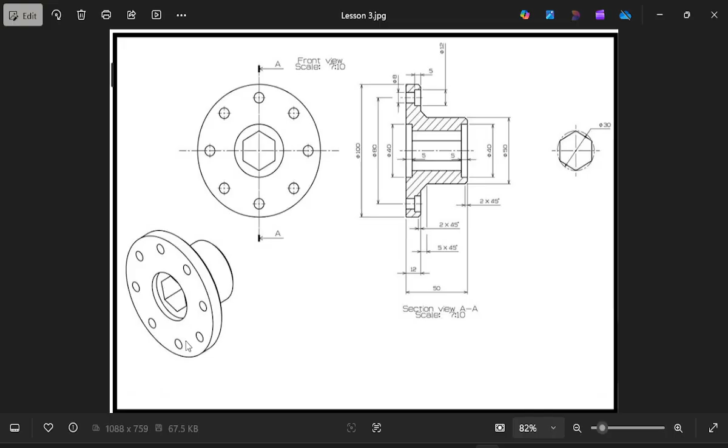Hello guys, in this video I'm going to make this part in SolidWorks, and this is a kind of flange but having a hexagonal hole in it. And if you want to see the dimensions, you can see them from the section view.

This is 100 diameter, maximum diameter is 100, and the center of the holes are at 80 diameter, a circle of 80 diameter. This hole is 40 and its depth is 5, and this one is 12, you can see it given here at the bottom, it is 12, and this from this line to this line is 50.

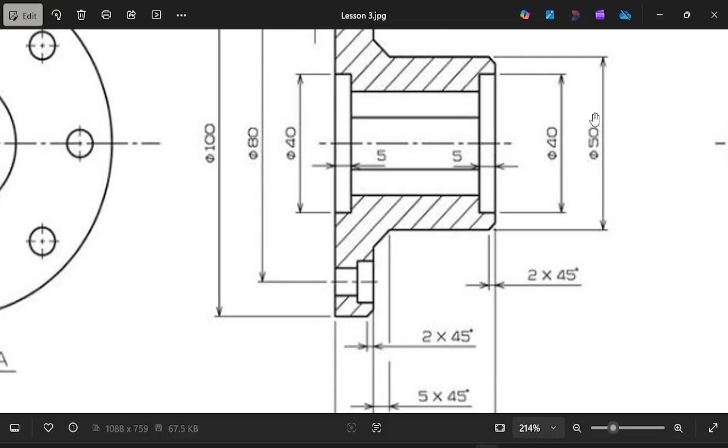And from this to this it is 50, and here there is a 5 chamfer and a 2 chamfer. The 5 chamfer is here, and this is 5 from here down, because this is 50 minus 40 divided by 2, it is 5 here and 5 inside, then depth, and then up to the center line, and then we will make this.

So we can make it using many strategies, but I will use the revolve boss base command in SolidWorks, and I will make half of the sketch.

This is the sketch. First I will draw a center line, then start a sketch, go to 5, this one, and because this will be 20, 40 is diameter, half of 40 is 20, so this will be 20 from the center line, and then this will be 5, and then this will be.

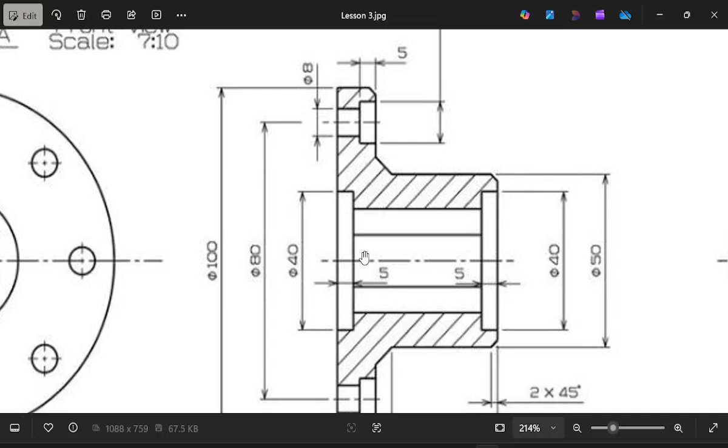50 minus 20, that is 30 up, and then 12, and then down it will be 25 here, so it will be 25 down, and then 30 this one, and I will use the chamfer of 5 this and 2 this, and then I will revolve the boss base, use the revolve boss base, and then I will make the cut according to the 30.

Circumscribed hexagon, and then I will make the hole and the countersink of the hole for the bolts. Okay, it is a kind of flange.

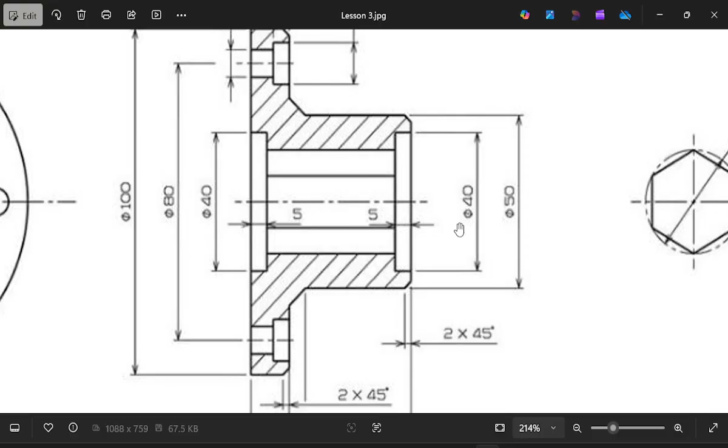So let us start this in SolidWorks.

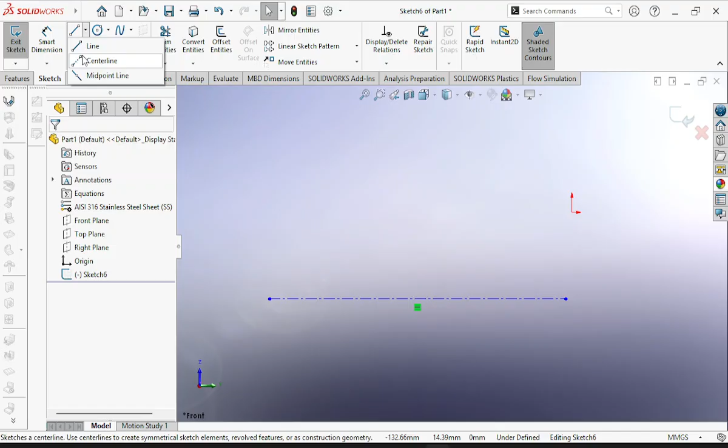So you can see here I have started a part already in SolidWorks, so I will start a sketch, this one. I will use the center line first, and draw a center line here anywhere, but it should be horizontal, so I will make the center line, and from this center line I will start the sketch as per our drawing.

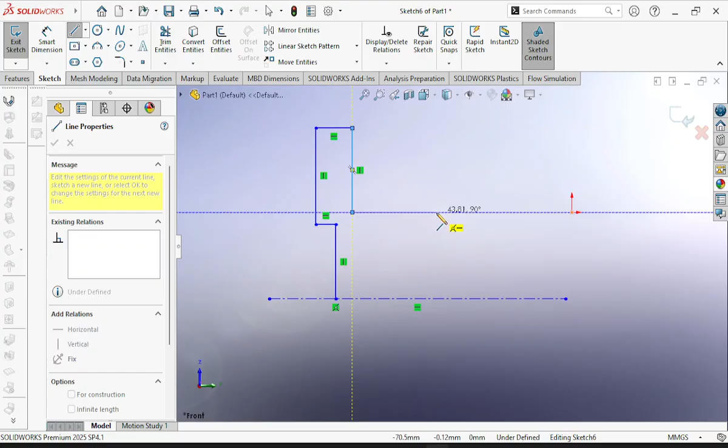So it will be 20 from this center line, 20, and then it is approximately 5, and then it is 30, and then it is 12, and then it is about 25, and then it is like 38, and then I will go down straight, and then I will close the sketch.

Okay, so our sketch is now ready, and now I have to give the dimensions. To give the dimension, I will use the smart dimension command. So first of all I will give the dimension here.

It is 20, 20, and this is 30, so that overall is 50 from the center line.

Okay, and this one it is 12, 12.

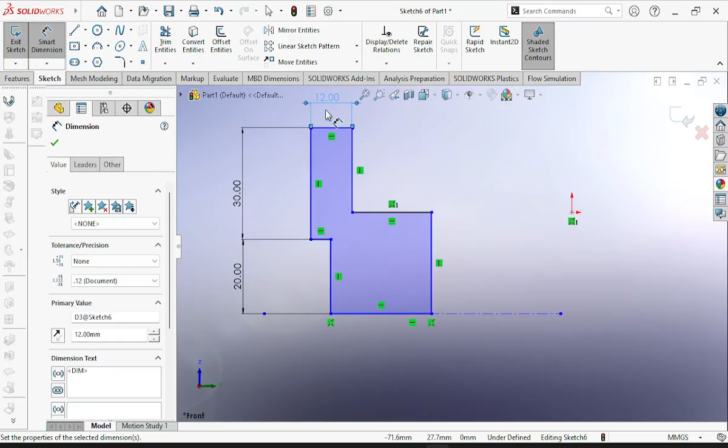And this is 25. This is 25 mm, and this is also 25 mm.

This is constrained already, so it will not take this one because it is 50 and 25. This line, it is already 25, it has given it. And this will not take this dimension as well, I think.

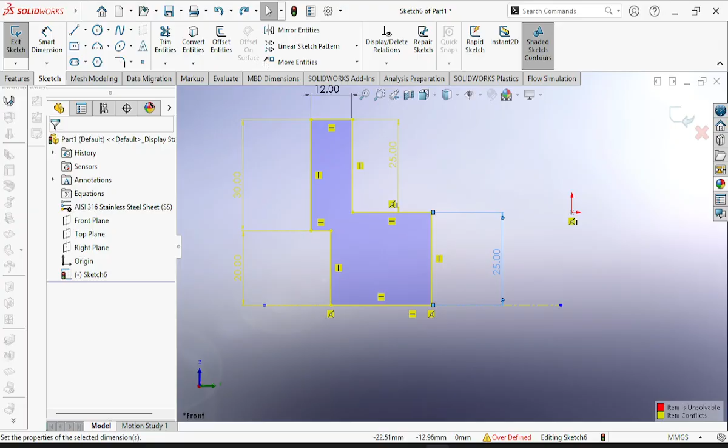So this bottom dimension is not required, but we need a dimension for this one, 5 mm. This should be 5 mm. This is 5 mm.

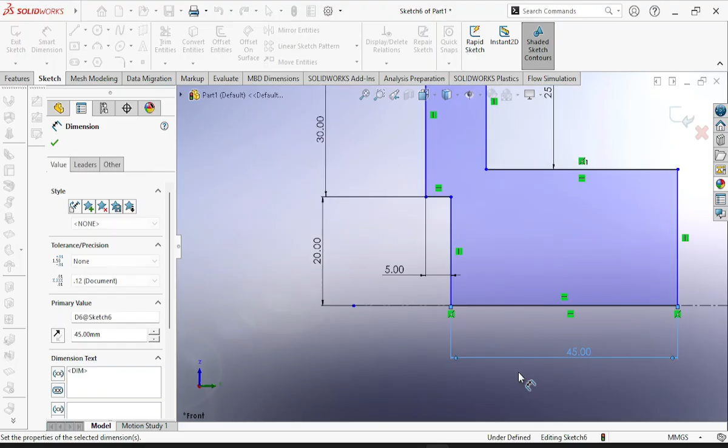So it is 50 minus 5, it should be 45 mm already, so it won't take this one, I hope. 45 mm. Okay, so it is 45 plus 5, 50, so it will be 38 mm. 38 mm is correct there, but it will not take it, it will be a driven dimension, not a driving dimension.

And now you see here, we have given most of the dimensions. Now it is time to make some adjustments, like there is 5 mm down and 5 mm here also, so I can make this one here.

Actually it was approximately 5 mm here, and then down like this. Okay, this was there, so I have to trim this side, and I have to remove this one as well.

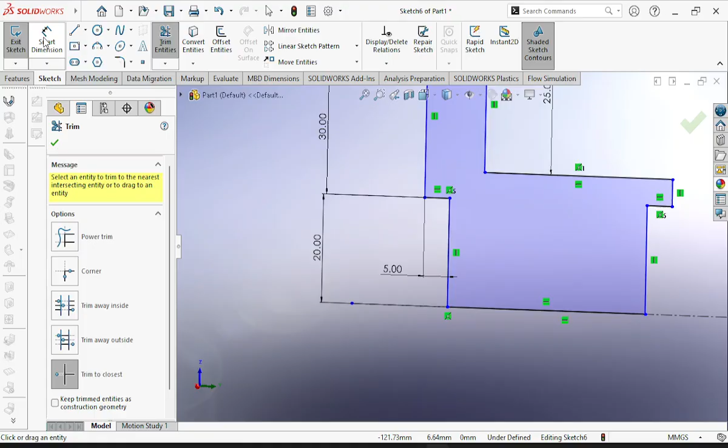Okay, so this is also 5 mm. This is also 5 mm, and this one is also 5 mm. 5 mm is there, it is already 5 mm.

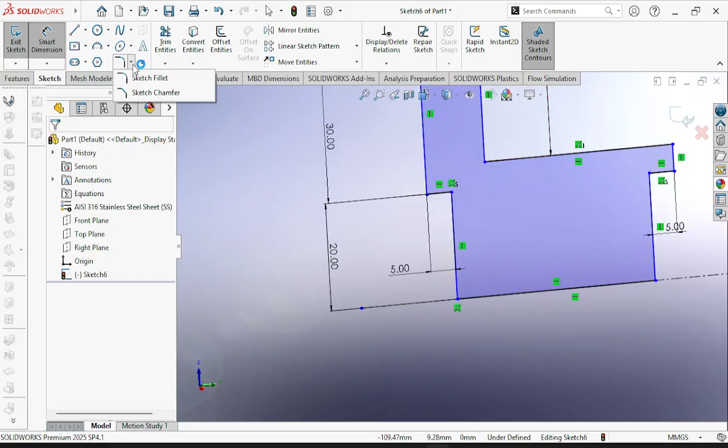Okay, so our sketch is almost ready, and now I have to apply the chamfer. To apply chamfers, I will take the chamfer, and on this corner it is 2 mm, and at the top corner it is 2 mm too. Here it is 2 mm and here it is 2 mm, so I will apply chamfers here.

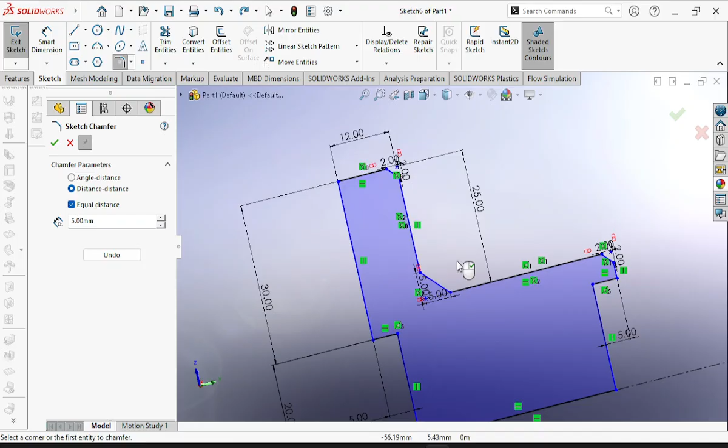It is showing 5 mm but I need 2 mm. First I will take, control S, and start chamfering again. The chamfer is 2 mm, and now this chamfer is also 2 mm. I will take the chamfering command again, and this chamfer is 5 mm. I will apply this chamfer here. It is 5 mm now. You can see it is 5 mm, and there is no other chamfer, so the sketch is ready.

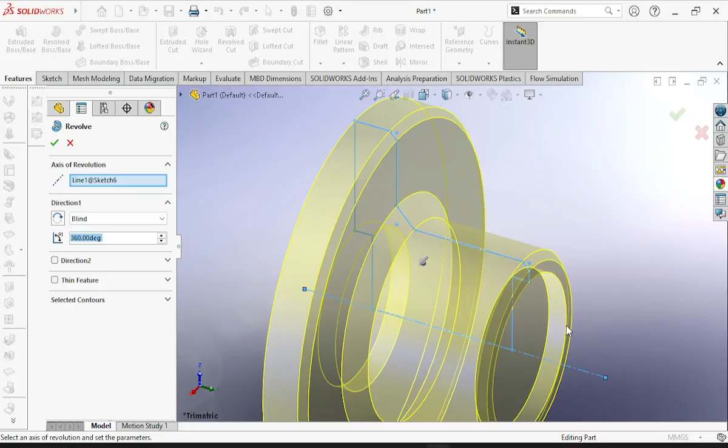So I will exit the sketch, and now I will take the Revolve boss base. It has already taken the sketch and the center line as the axis, and it is done. So you can see it is already here. This has been done, but I need only the holes. So first I will make the center holes, a hexagonal central hole.

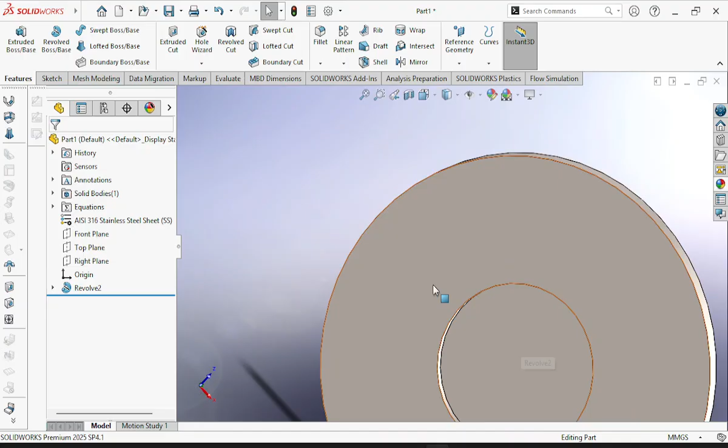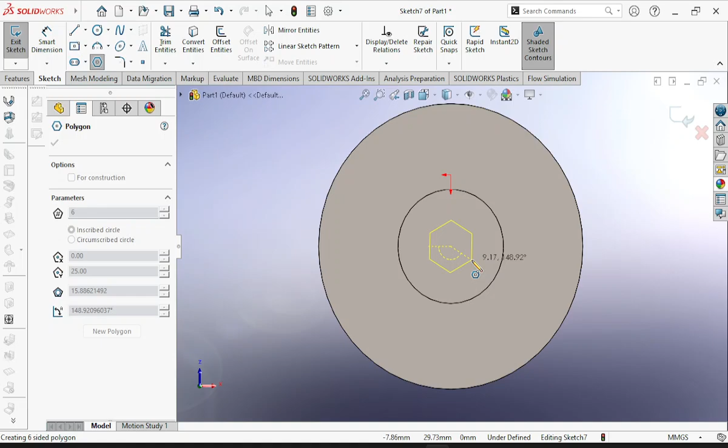To do this I will use sketch again and take the polygon. For the polygon it is 6 sides already, and I will take the center of this circle. Center is here. I will use this one, and it says inscribed circle, but I need circumscribed circle with 30 diameter. So I will use circumscribed circle, and the diameter of this is 30 mm. So I will use diameter 30 mm, then select OK, and exit the sketch.

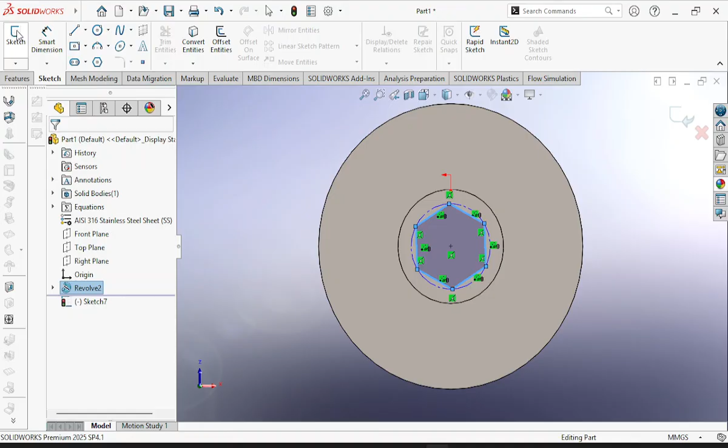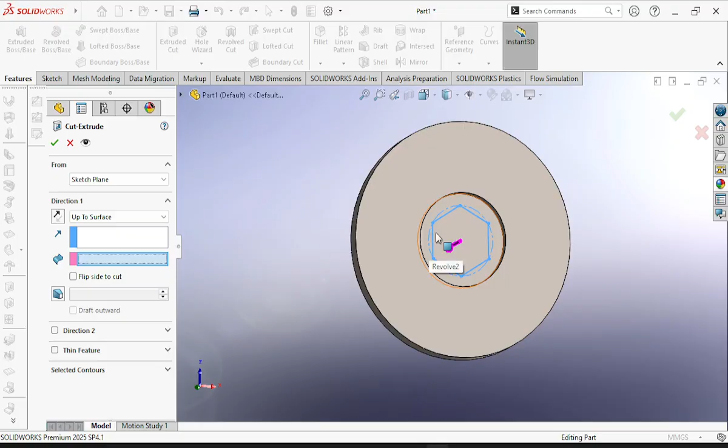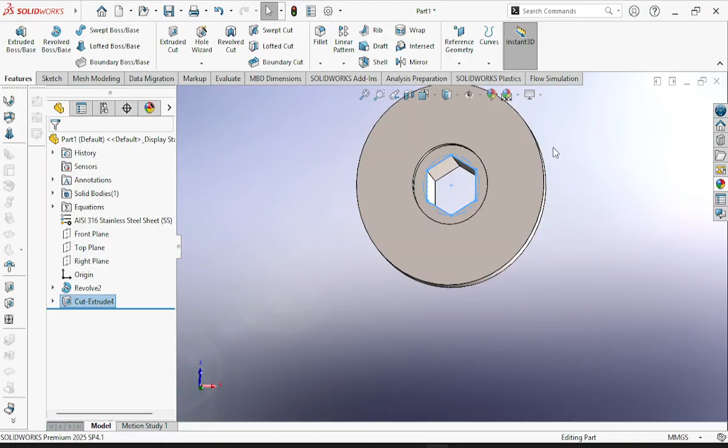And to cut the hole I will use the extrude cut command. I will take this sketch, it is here. First I have to take this. So we take it like this, up to the surface, then I will click OK, and you can see the hexagonal hole is cut in this part.

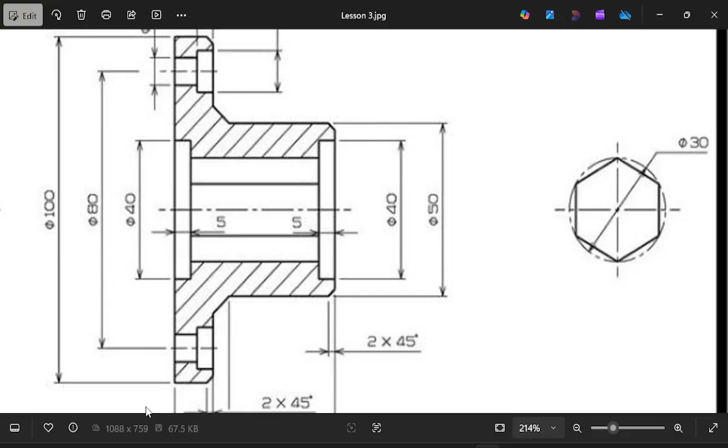Now I need to cut a circular hole at this periphery, and you can see the diameter, the position of the circles. This hole's center to center distance is 80 mm, so these holes will be on the 80 mm diameter circle, and the diameter of this hole is 8 mm, and the sink diameter is 12 mm. So I will first make the hole.

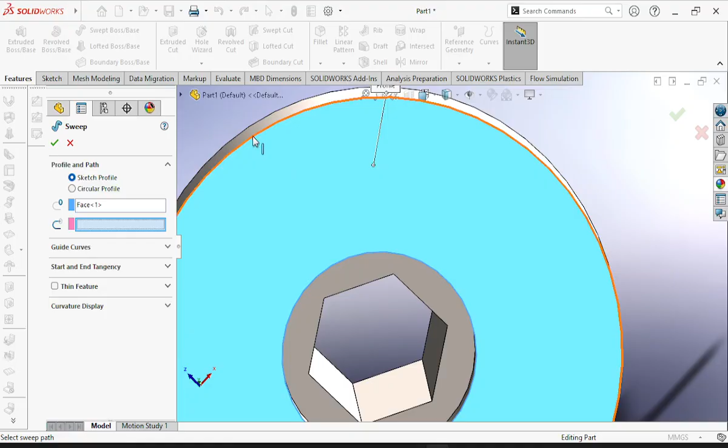First I will make the sketch here, and take the plane. I will take the sketch and take the plane, then create a circle here. Okay, or I can make the circle just at the corner of this side.

So the circle is drawn, and now I will give the dimensions. It is 8 mm diameter, 8 mm, and its distance from the center is - you can see the center distance is 80. It should be 40 because half of it is 40. So I will use 40, and then I will exit the sketch.

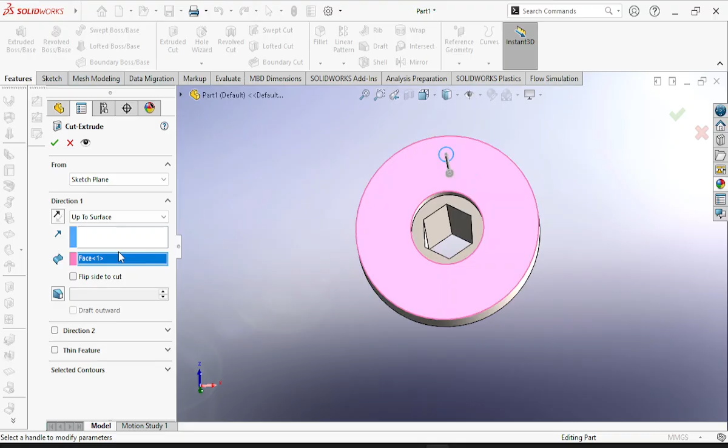And now I will create a hole. I will create a hole. So I will take the extrude cut command. First I will take the sketch, and here selected contours, I will take the sketch, this one, and a hole will be cut down.

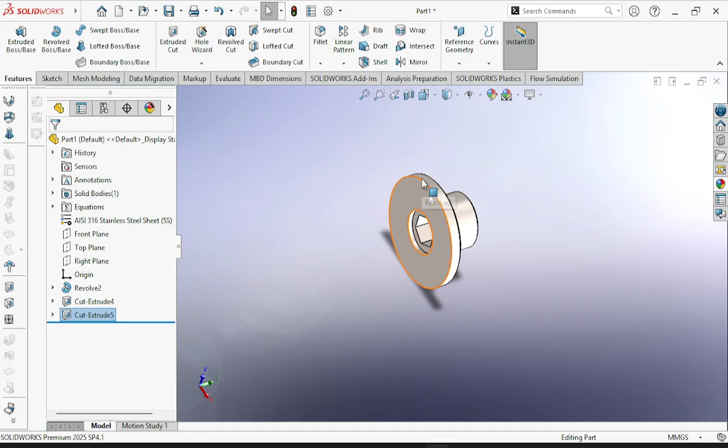You can see a hole is cut down, and now I will make a sink for the hole, 5 mm sink and 12 mm diameter.

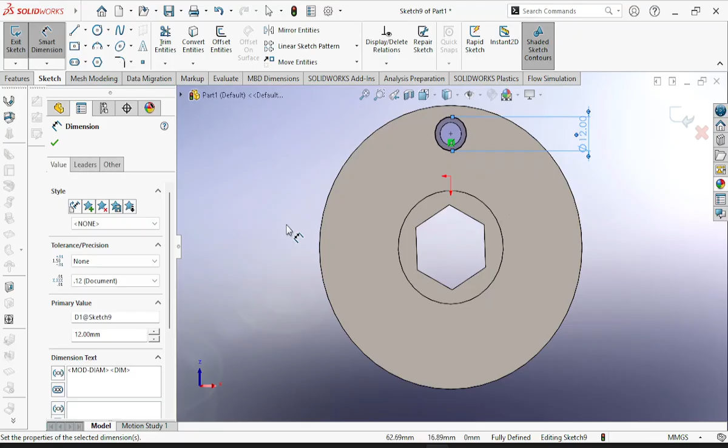Then I will take the sketch again, circular sketch, and take this plane again and draw a circle at the radius center of this, and its diameter should be 12 mm. So it is 12 mm, and the depth of this will be 5 mm. So I will exit the sketch.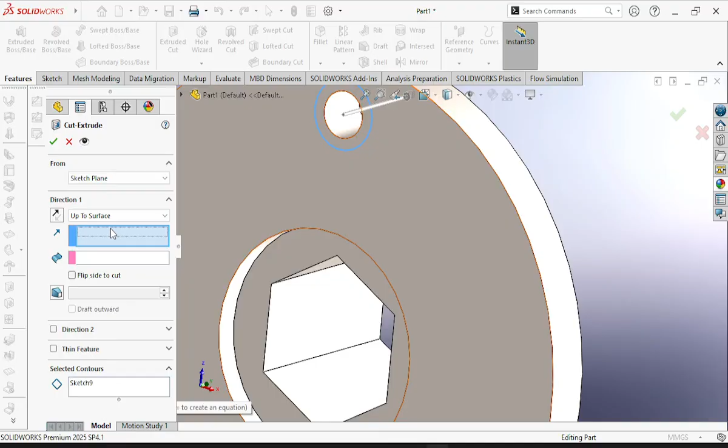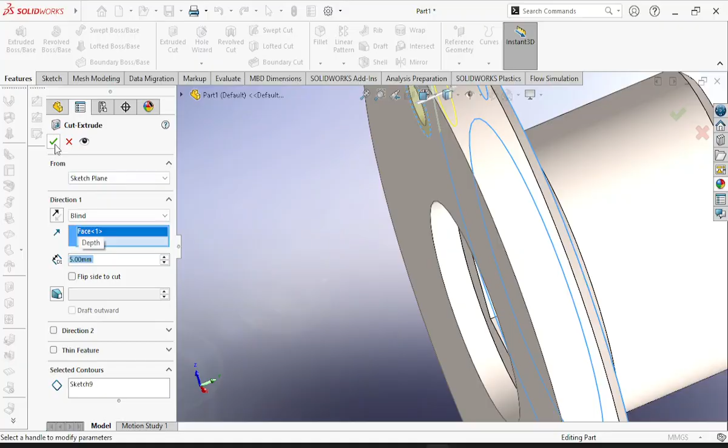Again take the extrude cut, and then I will first select the contours. It is the sketch already, it has taken. Now I have to select the other surface here - not other surface, it should be blind, and for blind I will give the dimension like 5 mm depth. You can see 5 mm depth is there, you can see in this one it is 5 mm. So 5 mm depth is there.

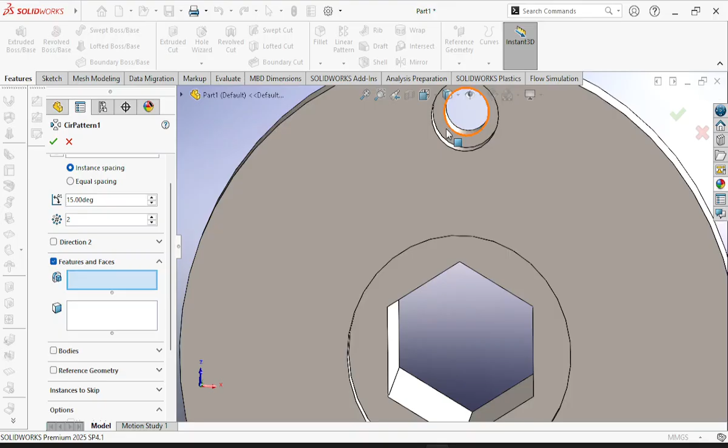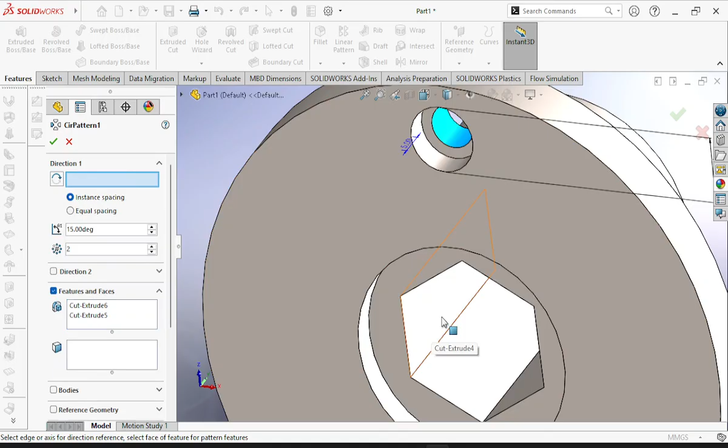Now I have to make the pattern, so I will choose the circular pattern, and then take the features and faces. I have to select, so I will select this one, this one, this one. So I will take this one and both of this, and then I have to take the directions for this one. So I will take this one and make it angle 360 degrees.

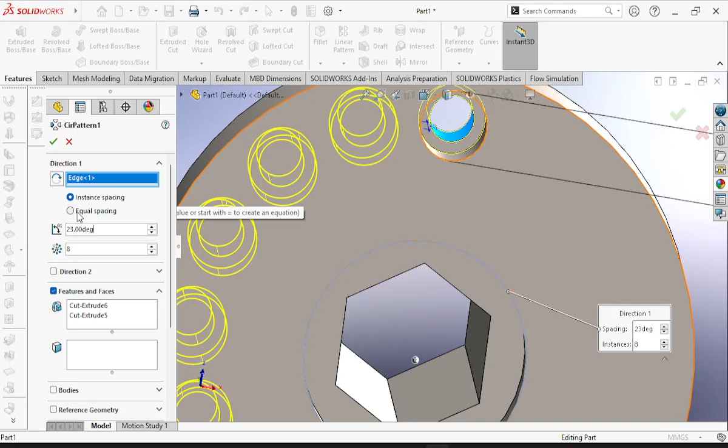And it will be like 8 patterns, 8, but the angle is - this is not angle, but I will make it 8 and equal spacings, 360 degree equal spacings. So this is ready, and I will select OK.

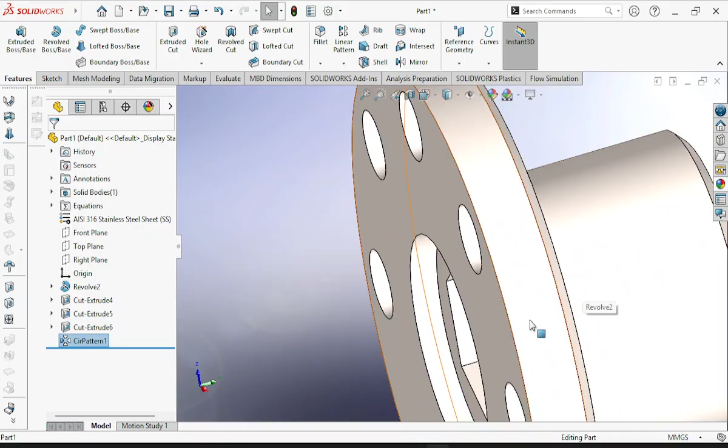So all holes are done. Here you can see this part is done in SolidWorks, and you can see a part is done. And thank you for watching.